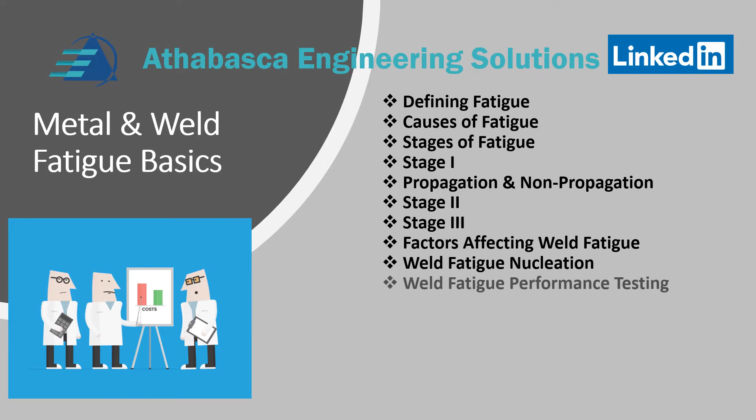And then further on, in the future videos, we're going to be looking at factors affecting weld fatigue, fatigue nucleation, and the topics shown here. So let's continue with propagation, non-propagation, stage 2 and stage 3 cracking.

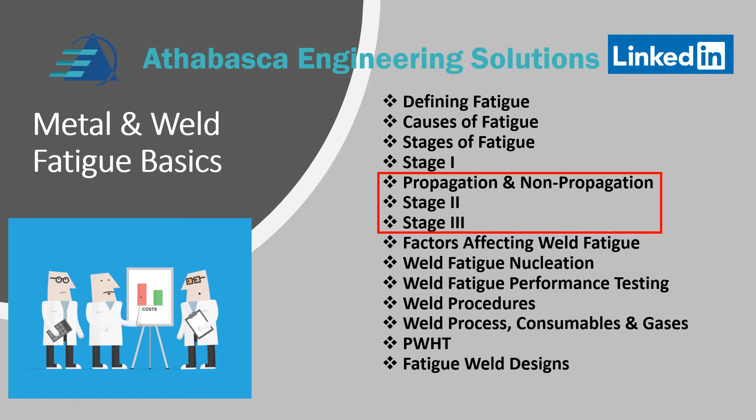So propagating and non-propagating cracks. This is really important, and we spend a little bit of time on it because a lot of the problems when you look at cracking is, okay, you have a crack present, but if we, say, derate the pressure of a vessel, or do something to reduce its capacity, maybe lower the tank level so the stresses are lower, perhaps as a strategy these cracks will stop propagating, and we'll be able to run this equipment indefinitely. That's a valid strategy, right?

So we have cracks that still remain sharp, and then we've got non-propagating cracks where there's some ductility in the tip, and it serves to blunt the material. So propagating and non-propagating really depends on the amplitude of the fluctuating load or the stress ratio and the toughness of the material. If it's a very tough material, then you have a very good chance of blunting those cracks.

So we're going to talk a little bit more about propagating and non-propagating cracks. I've got a few figures here we'll talk about. Cracks propagate due to the sharpness of the crack tip. Okay, that's the first thing. And if the material is plastic, it can deform the tip and then blunt the crack growth. So if you have a very tough material with a lot of ductility and it can strain harden a lot, then it can really serve to blunt the crack tip and prevent the growth.

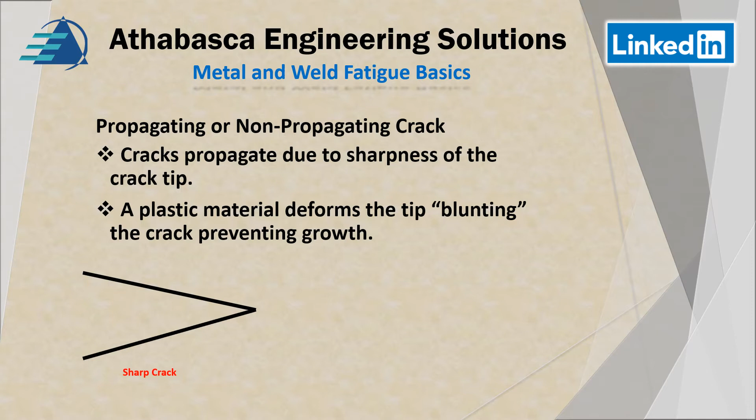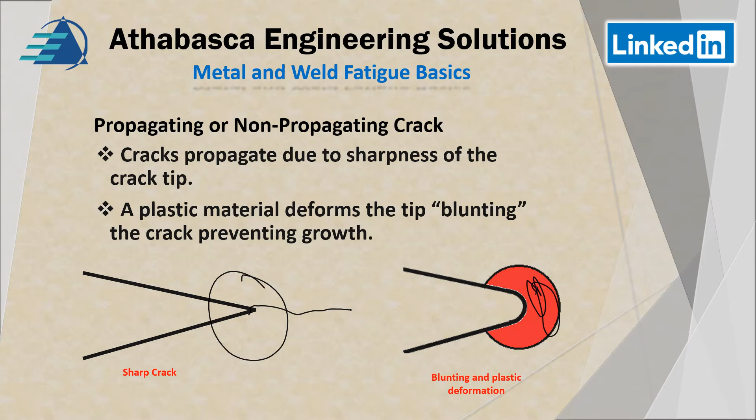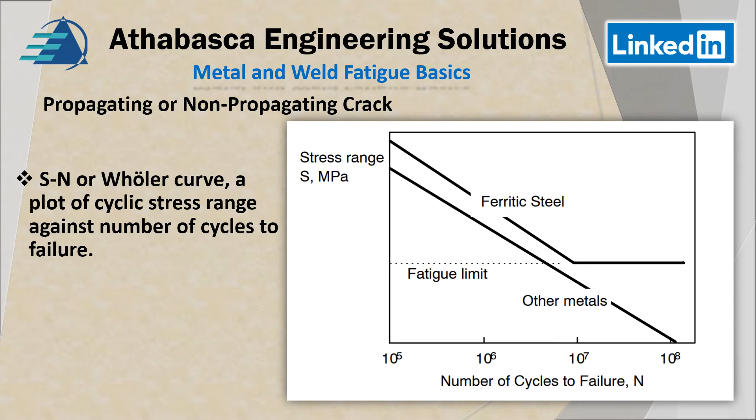But other materials such as aluminum will definitely have a life, and they're not as blunting as steels are. And that's the beauty of steel, is that it can handle a lot of cracking and abuse, and it can continue on for a long time. So that's the S-N or Wöhler curve. So let's continue. We're going to look at the second part of this, which is called stable crack growth, stage 2.

So, factors that affect stage 2 cracks. Crack propagation is determined by the maximum stress range, the maximum stress minus the minimum stress. That's the definition; that's a term that's used by fracture mechanics people. So it's basically trying to understand the amplitude, right?

And then the crack propagation is also determined by the microstructural characteristics. So if you look under the microscope, you might look at the grain size and the shape of the grains, and the distribution of the second phase particles in the matrix. So if you have a lot of very hard microstructural particles like martensite, then they're very, very brittle, and they can contribute to crack growth. So those are the factors that are associated with this.

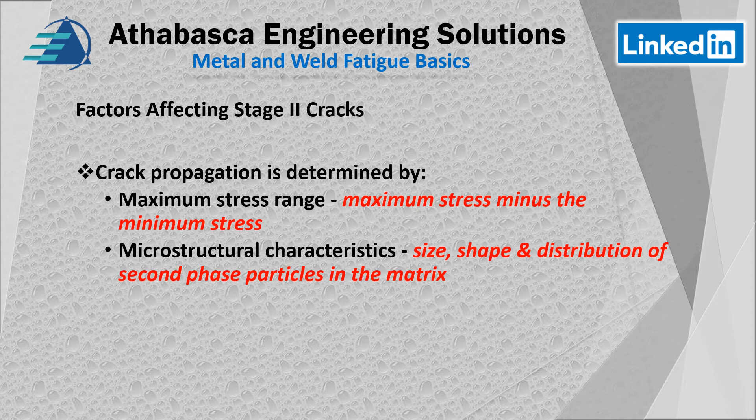Now, let's continue with more discussion on that. So, as a rule of thumb, if we increase our yield strength, we will reduce our ductility. This is not every case, but typically for carbon steel and mild alloy steels. And if we increase our yield strength, we drop our ductility, but we increase the crack growth rate. And this is due to the reduction in extent of plastic deformation experienced by materials ahead of the crack tip under the influence of an external load.

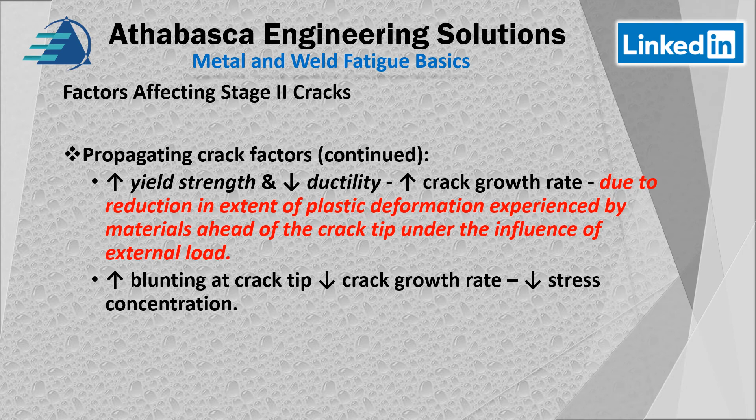And if you want to increase the blunting of a crack tip, you decrease the growth rate, and you decrease the stress concentration. So that's how important the blunting effects are. So we're going to continue on to stage 3, and we'll talk more about that.

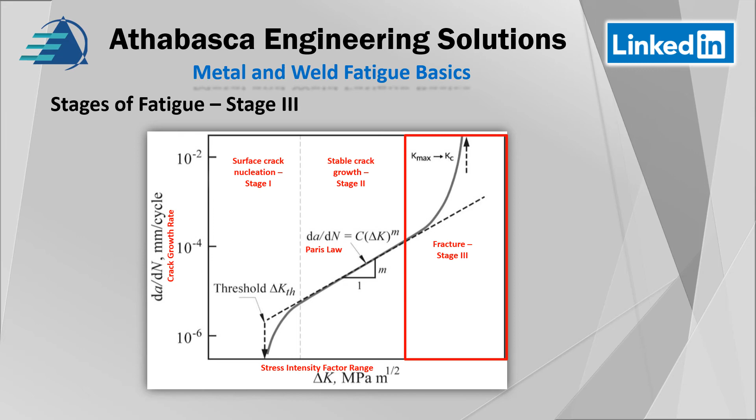So you can see over here in this part of the graph, we had a sudden appearance of a crack due to the nucleation, and that's sort of the threshold stress. And then we moved on to this constant growth rate, kind of modeled with Paris's law. And then suddenly we've got this fracture that occurs, and we're going to talk more about this sudden failure. This is the most undesirable part, because that's when the part ends its life, right? And so we'll continue with this.

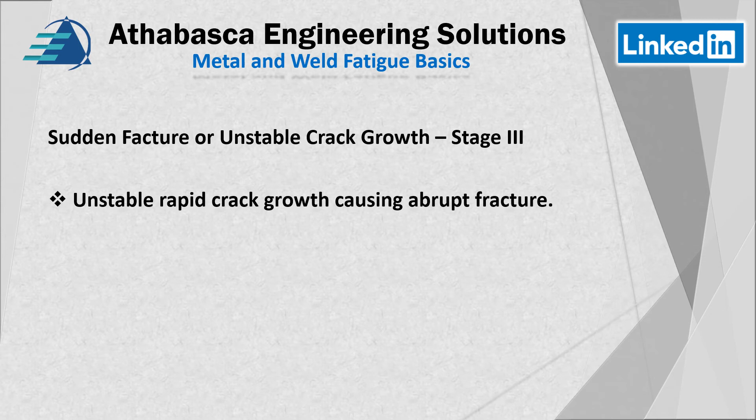So we got this unstable fracture. It's characterized by a catastrophic failure. So it's unstable crack growth, which causes abrupt fracture. So basically, it's an overloading event that occurs when the applied stress exceeds the tensile stress due to a reduction in area, because that crack across the cross section of that part will decrease the cross-sectional area, and of course the tensile stress is the force divided by the area of the part.

So if the cross-sectional area is reduced because the crack grows, there's less area left to carry the stress. So as the crack grows, the stress grows. And so that's basically the mechanism for what happens. So it's a mode of fracture, and it may be ductile or brittle. It depends on the type of material and how it fails, because sometimes the part at the end can neck a little bit and then fail if it's high ductility, or if it's like cast iron, it'll just suddenly snap and break. And so it exhibits those properties.

And of course, that's all temperature dependent, because if you have a material at very, very low temperature and it's not rated for those temperatures, then even a ductile material can act like a brittle material, right? And if you want to know more about it, it's called MDMT, and it's found in our earlier videos. We made a whole bunch of videos on that, so we can understand how those engineering issues are handled.